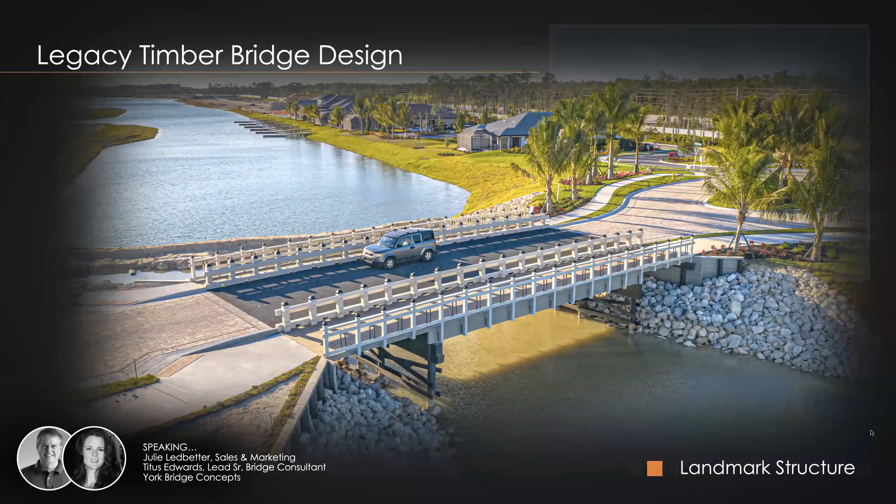The Discovery Park of America is in a very small town in western Tennessee, in Union City. This whole museum was the vision of Robert and Jenny Kirkland. He owned a little furniture store downtown, became successful, and gave millions and had the idea to build this museum. Outside the museum is a 50-acre park that's part of it called Heritage Park. The idea was to pay homage to the old-time Tennessee landscape. What they have here is a created stream that goes into a lake, all kinds of landscaping, and there's an old grist mill there. What they're trying to do is recreate the feeling and the look of turn-of-the-century Tennessee.

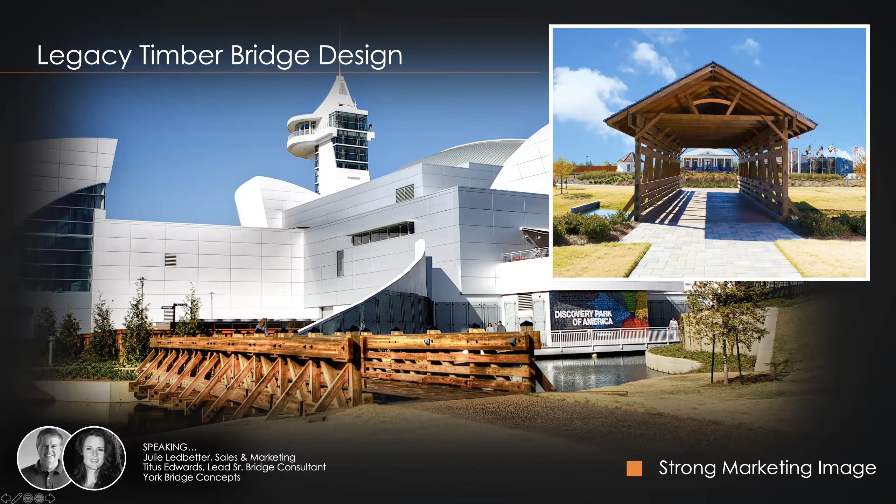I wonder how many times, I'm going to guess it's probably in the millions, that people have taken pictures on our boardwalks here at River Lights and posted them all over social media. And you can see why. We ended up building beautiful boardwalks and bridges for this residential community. Julie, this is a Newland community in Wilmington, North Carolina.

Every time I think of the Cape Fear River, Julie, I think of that movie, the Cape Fear movie with Nick Nolte. Yeah, don't remind me of that one. Jessica Lange, that houseboat in the hurricane, man, exciting.

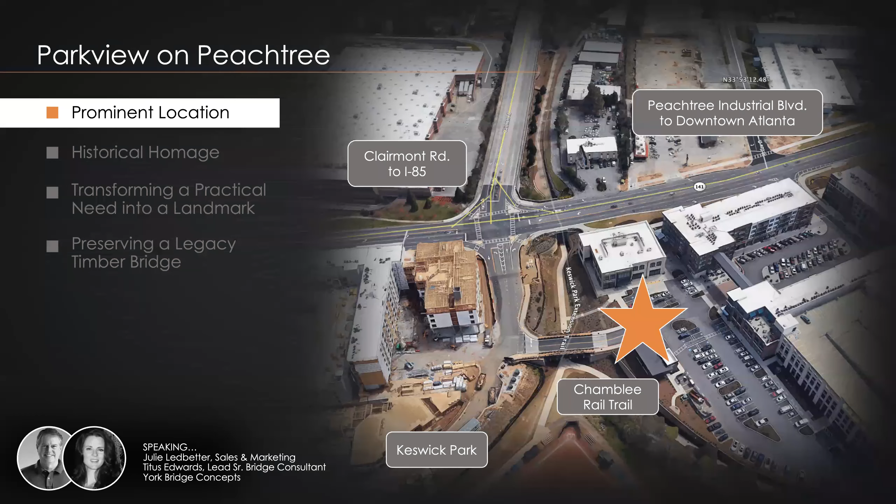And this is really an older section of town. There was an old strip shopping center over there on the right, and the ground on the left was all undeveloped. J.R. Connolly, the developer, bought this land with the idea of developing it. But it was all about where it was located, such a highly traveled, visible area.

And there's all kinds of railroad tracks that run through there, so he wanted a bridge. He needed a bridge to connect two sections together, and so we were able to come up with a design that kept that homage.

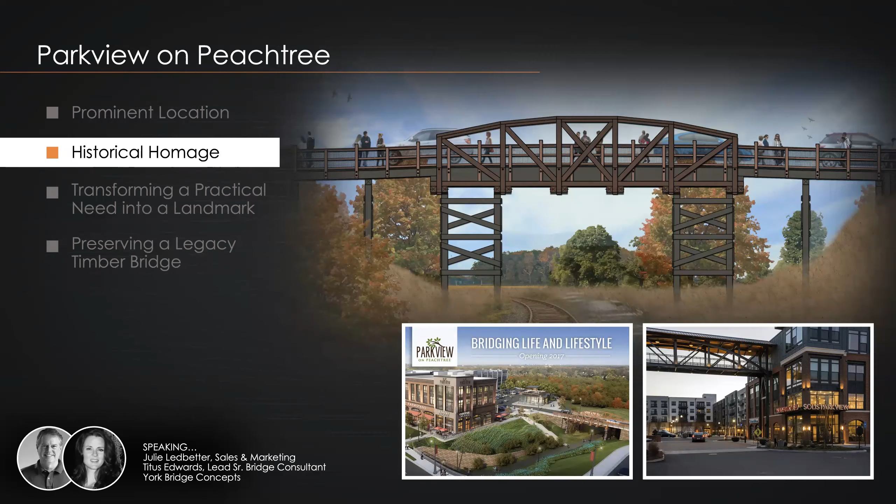You know, Julie, J.R. Connolly and Amy Wells, whom we also worked with on the project, told me that they nearly wore out that picture board of our conceptual drawing. They blew it up, made a big board, and carried it to all of the city meetings and public hearings they had to go through for 2 years, and they nearly wore it out. But do you know what? They showed the intent of the bridge in the middle of this crossing, and it helped get public interest and approval for the project. He said the people loved it, and it turned out very well.

Yeah, absolutely. And just a side note on that, because we can get involved so early in the process, since we are custom design build, that's definitely an advantage to you, our clients, to call us as soon as possible.

When you call us in the beginning stages and say, I think I might have a crossing need, we can definitely jump in and show you what we can offer. Instead of waiting until the bid process or later phases of planning, there's actually a great webinar on that. Rachel Marshall, one of our in-house design experts, did one a couple months ago on designing with YBC, and you can go more in depth into that process with her in our recorded webinar.

But yes, getting back to Parkview on Peachtree, here's a great profile shot. You can see the pedestrian walkway underneath, and of course the beautiful embellishments of the bridge itself.

You saw in the previous picture that there are two segments of this mixed-use development. On one side you've got residential, on the other side retail and office. They had to cross over this trail that connected to Keswick Park and brought them up to the road, and eventually you could walk all the way and connect into the Atlanta BeltLine system.

And of course, what good would a legacy timber bridge design be if it didn't last, Titus? So we don't just put a bridge in place using shabby materials and a bad design. We're going to put a 75-year design life on this bridge. I've actually walked on this sidewalk underneath and looked up, and it's amazing when you see the massive timbers of these vehicular bridges that we build. You see the finishes on the piling, the acrylic polymer to help protect it, and this is true of all the exposed wood.

So you have this legacy design that mimics an old steel railroad truss bridge, though it was all built out of timber, and it's beautiful. It matches the theme of the entire development, it fits in, and it serves a practical need. It just hits every button and bell we've been talking about, Julie.

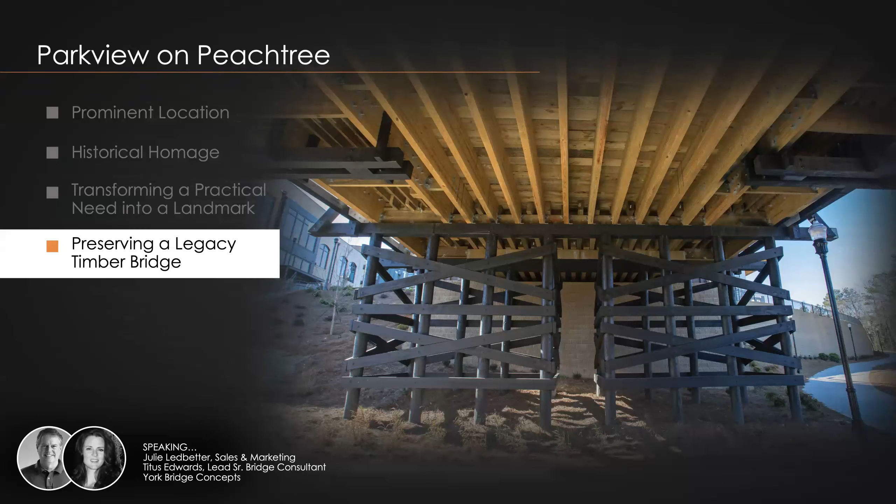Absolutely. Okay, so that's case study number one. Now let's move on to Dallas, Texas, to the Hilton Anatole Hotel. If you've been to this hotel, I guarantee there's somebody in the chat who's been here. If you can chat me and tell me, hey, I've been here, we'd love to hear from you.

This is actually the rendering that was produced for the Jade Waters Aquatic Water Park. This Hilton Anatole is a beautiful hotel, Julie. It was actually built in 1983. It's a conference center with over 1,600 rooms. And you can see how they ended up wanting to build a special water park. This was all done in 2014, when they added this Jade Water Park as part of the Hilton Anatole.

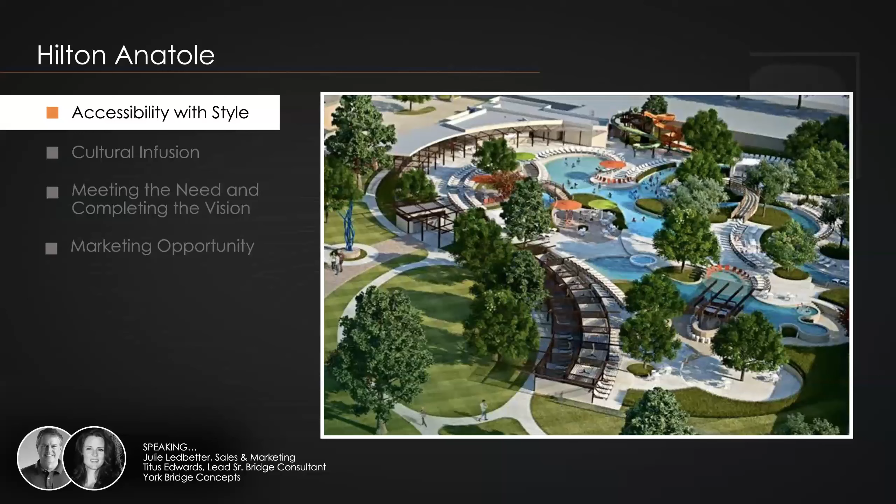As you can see on the rendering, there are a couple of places that were necessary to cross over the lazy river, so there was a practical need for the service people as well as the guests to cross over and enjoy the water park. When you have a water park, you normally always have a lazy river. I bet you and your kids have floated down a lazy river before, Julie. Absolutely, yep. But that means when you have a lazy river, you're cutting off part of the interior land, so to access it you've got to have bridges over the lazy river. And that's what you saw earlier.

But instead of just focusing on the practical need, the Hilton Anatole Hotel, which houses the Crow Collection, an Asian-inspired collection with lots of cultural infusion from all over Asia, from China to Japan and Korea and Thailand, collected all kinds of art, sculptures, and paintings from all over. And they really wanted to infuse that into the Jade Waters Water Park.

So as you can see here, these beautiful reds that pop, these ornamental post caps and the arches. Of course, you can see the actual picture of jade, and what color is it? Well, you've got your greens and your burnt oranges and reds going on.

And the entire hotel conference center and even the rooms have this Eastern Asian design to them, and the water park carried that out as well. They have all these art pieces, like Julie just mentioned, in the hotel as well as out in this water park area. So when you're talking about this type of theme, obviously you want to bring those same design concepts and colors into the bridges.

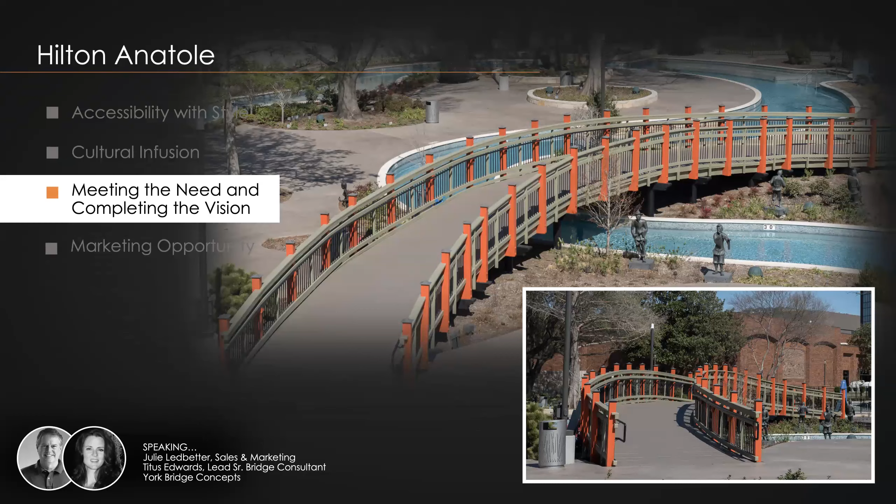Even if you notice the little details on the post caps—what does it resemble, Titus? It looks like some of those temples they have over in the Orient.

So the second bridge is the service bridge. As you can see, some of the same color palettes and post cap designs, but look at those lovely glulam beams—very interesting bridge. This bridge has stairs, where the other one did not. The purpose is that there are times when service people need to get to the interior to serve food and drinks to guests laying out there, so they have their own bridge to get over and back more quickly than using the access bridge. You can see the same colors utilized, a similar design, and that beautiful glue-laminated beam with the arch that gives this such a legacy, great design.

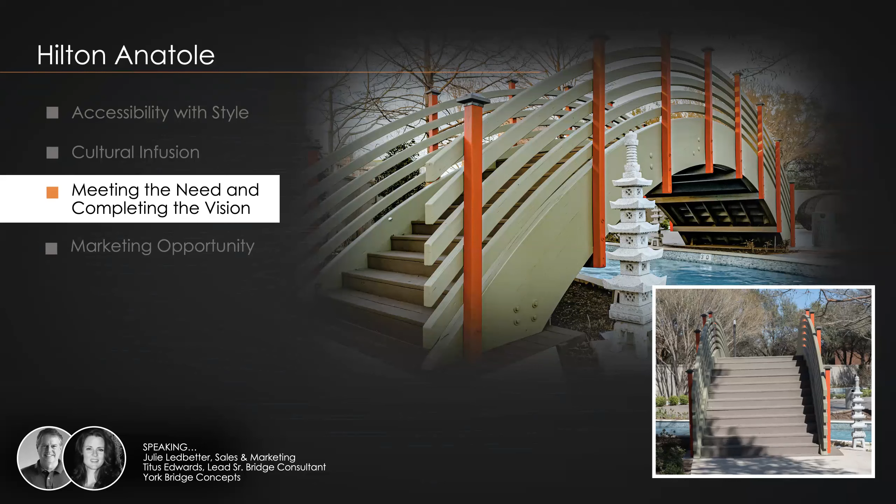Can you imagine floating down the lazy river underneath this bridge and enjoying the view? It'd be beautiful, wouldn't it?

Yes, it would. So our final crowning piece is our moon bridge—probably less of a practical need, but it's still rated at 85 pounds per square foot loading capacity, so you actually can climb over it. However, they've decided that's not a good idea; it's just for ornamental purposes. But that lovely red, that pop of red, and those post caps—just amazing. A timber bridge as a piece of art.

Julie, you said this was the moon bridge—now we have to tell them why it's the moon bridge. As you can see in this picture, the reflection on the water—they were built over water—and the reflection on the water actually completed the arch and turned it into a moon. So as the moonlight hit the structure in a Japanese garden, it would create that perfect circle in the moonlight. That's why they call it a moon bridge.

What a wonderful design and concept, and again, back to that whole cultural, historical theme for the hotel and the Jade Water Resort Park. Beautiful stuff. And James York spent a lot of time doing research to get the style of this project just right, specifically the design of this bridge, and the results are just amazing.

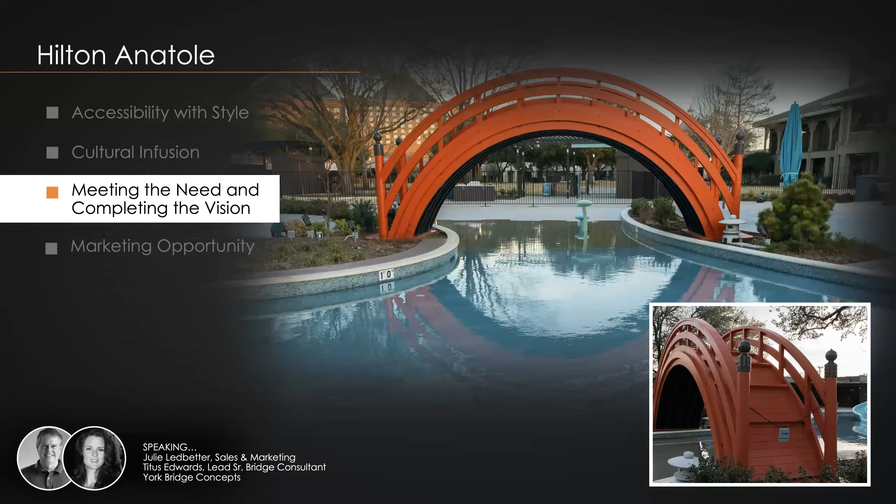I bet this is beautiful at night too. Absolutely. Speaking of marketing, I know that may not have been the most important selection on our poll, but this is an example of when it's important to get that great marketing piece to garner social media attention, because then you see it. If you Google the Hilton Anatole Hotel, what pops up first in the images, Titus? That moon bridge will pop up. There you go—you want to make reservations, look what you're going to see. Very first thing. You can see the other bridges in the background, but there to the right, that's that moon bridge. Great marketing.

And as far as a landmark structure, you guys said that was important. Well, it definitely is. Just know that if your kids go there, they will remember that big red bridge. If they're anything like my children, they will have climbed on it, and I would have told them no several times—but they will definitely remember, and you'll say, let's go back to that.

You may not even remember the name of it, but you may say, 'Let's go back to that place that has the big red arch bridge in it.' So, again, this is very unique and very special. It just shows the talent and ability York Bridge has to come up with these legacy designs for any type of project.

Well, we still have one more case study to look at. Of course, we can't talk about legacy timber bridges without talking about covered bridges, right? That's what we do best. Of course, they're landmarks.

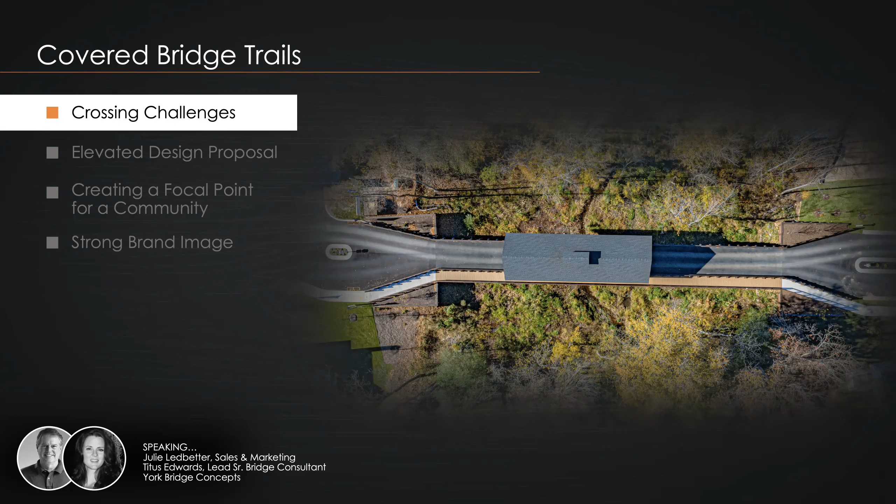So the practical need is there, and we solved that, but there's a whole lot more going on. Yeah, they hadn't originally thought of a covered bridge—they just looked at the practical need, and several different factors led them to do a single lane. So for it not to become this 'oh boy, I got to wait for traffic' situation, they said, you know what, let's turn it into this iconic structure that people enjoy going across. Maybe they don't mind waiting for the next person to come.

So you add this beautiful covered section to it in the true York timber bridge style. You'll never see anything like it. It's uniquely a York design. Well, it's a beautiful design.

Yep, it's yet another example of why it's important to get York Bridge concepts involved early in the process, because we can be influential and helpful with your vision and your concept. So the earlier we are in your project, the more options you'll get, and the more likely you'll get the result that you want.

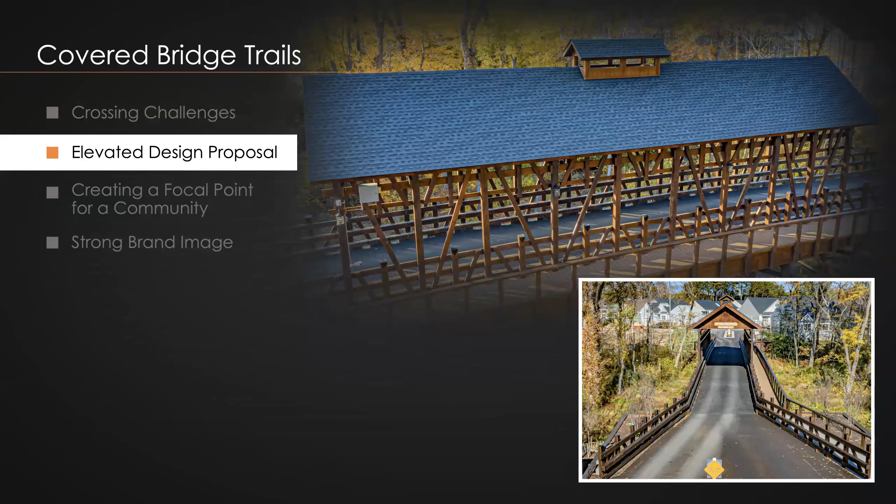Julie, Lewes, Delaware is an interesting place. It's in Sussex County—we've built a lot of bridges in the county, and this is along the coast of Delaware. Lewes is a charming little town. Julie, have you ever been to Lewes, Delaware? I have not. It's beautiful—you need to get the kids and Josh and go there one of these days. It's full of specialty shops and fine dining. They've got great beaches there and nature trails. It's all about enjoying nature in this charming little town.

And you can see how this timber bridge, the legacy covered bridge, fits into the theme of the overall town and this particular development. Notice, Julie, how the sides of the bridge are open so that people driving through can see out, even though they're driving through a covered timber bridge. What a wonderful legacy design for this crossing.

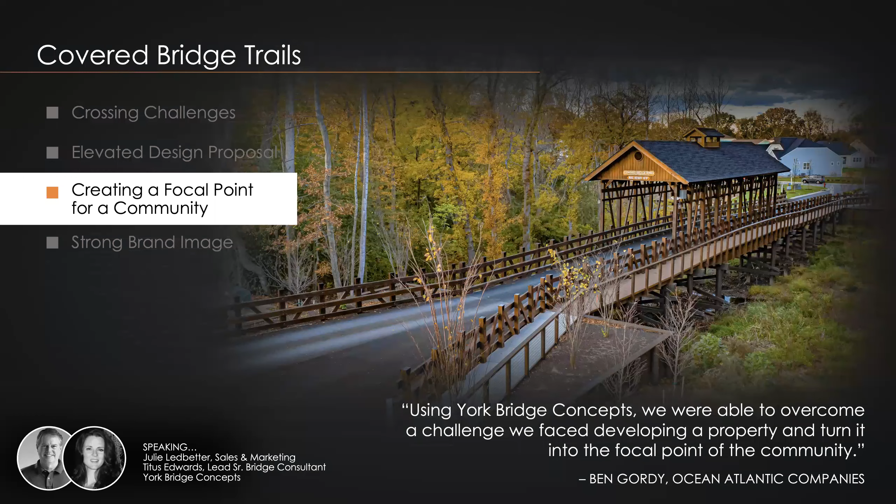Yes, definitely a focal point of the community, and a great example of how you can turn a challenge into a special opportunity like this. So it generates, going back to our 5 points, community pride and identity, but also creates a strong brand image. It's a selling point—people go to look for an active adult community on the East Coast, and they see this wonderful community called Covered Bridge Trails with this awesome bridge, and it definitely piques the interest and gets a lot more exposure for people looking.

In conclusion, we have some design resources. If you want to go ahead and get started looking through some resources on our website, you can go to ybc.com/timber-bridge-designs. That's also in the chat.

If you click directly through there, we have load capacity diagrams, truck loading diagrams, and use illustrations. We do have some CAD files—they are generic CAD files—and also some generic span drawings, all of our project cut sheets. You can also look up guardrail, handrail designs, and all of the different special customizable items that are on our bridges that we can work into your design. You can go ahead and get started looking at that.